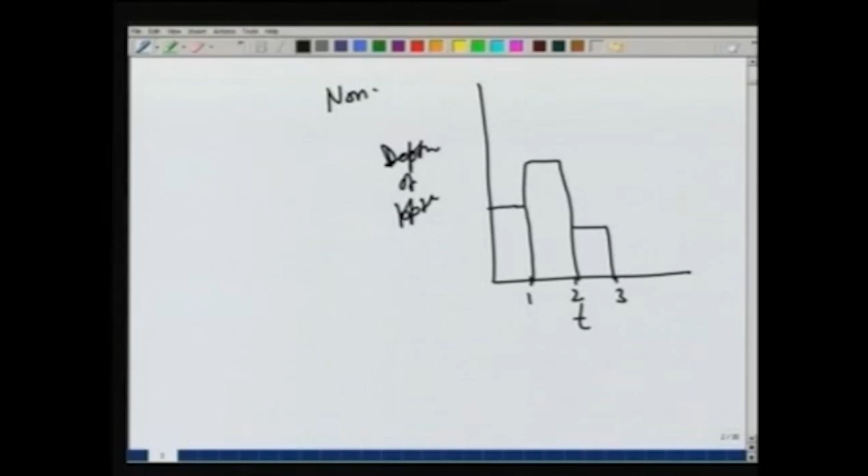would typically look like time versus depth of precipitation, and this will be 1 day, 2 days, 3 days like this, and there will be some depth measured during that day like this. So, this kind of precipitation record comes from a non-recording gauge. The drawback is that within a day we do not know when the rainfall occurred, and sometimes during the day the rainfall may occur with a very large intensity and we will not be able to capture it.

That is why recording gauges are used, and we saw three different kinds: the tipping bucket, weighing type or weighing bucket, and float, sometimes also called siphon. So, these recording rain gauges maintain a continuous record of the precipitation. So, time versus depth of precipitation would be a continuous curve which will be a continuously increasing curve, and different portions will give the intensity of rain. If there is no rain, then it will be horizontal.

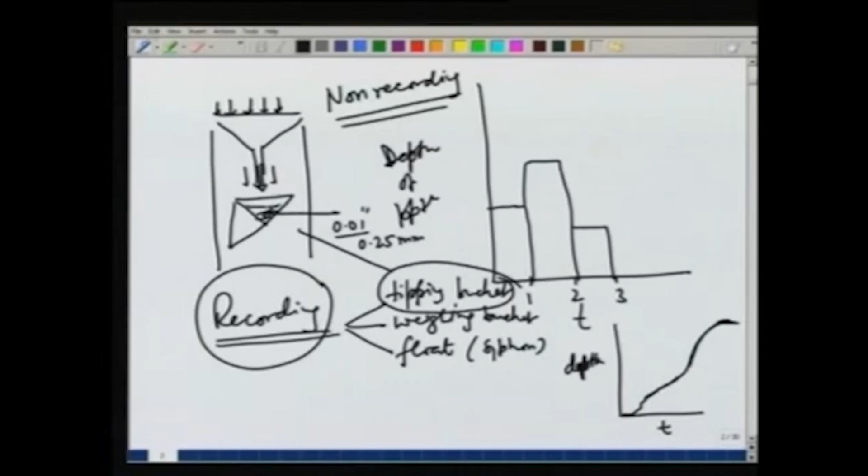In the tipping bucket rain gauge, we saw that there would be an arrangement like this, where there will be two buckets, and the precipitation, typically collected through a funnel, will fall over one of the buckets, and when the bucket is filled up to a certain level, this level generally is about 1/100th of an inch or 0.01 inch, or in millimeters 0.25 millimeter. So, that much precipitation occurring over the area of the opening of the rain gauge will fill the bucket up to some point, and as soon as it is filled, it will tip over and the second bucket will come

under the funnel. So, in this way the record of the tipping bucket would look like time versus depth, where depth really means one tip of the bucket. So, it will represent 0.25 millimeter or 0.01 inches. So, depending on how intense the rain is, we may get a record like one tip here, one more tip here. So, it will be discrete tips, and the number of tips will show the intensity of the rainfall. So, tipping bucket can record the variation of intensity with time.

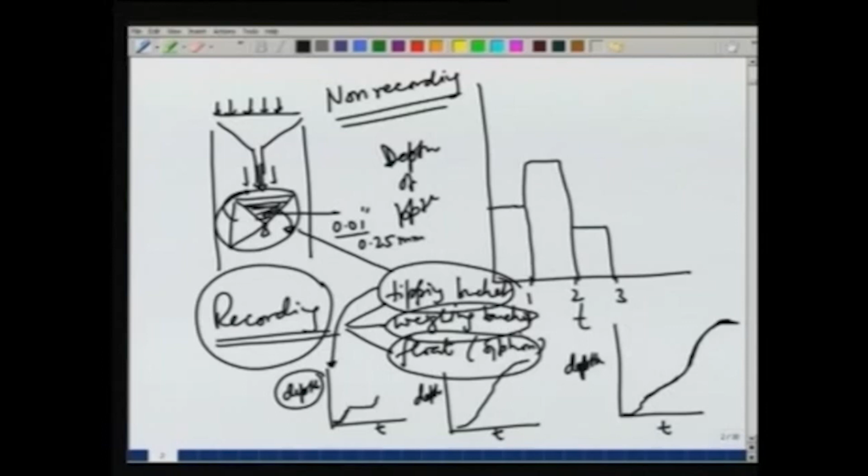Weighing bucket: instead of this tipping bucket, we have a bucket whose weight is continuously taken, and the weight can be calibrated to give the depth, and it will again give us a continuous record like this. Similarly, in a float or siphon gauge, the rain is again collected through a funnel. There may be a chamber here in which there would be a float which would rise with water, and this float will be connected to some measuring instrument which will record the location of the float and therefore the depth of rainfall continuously.

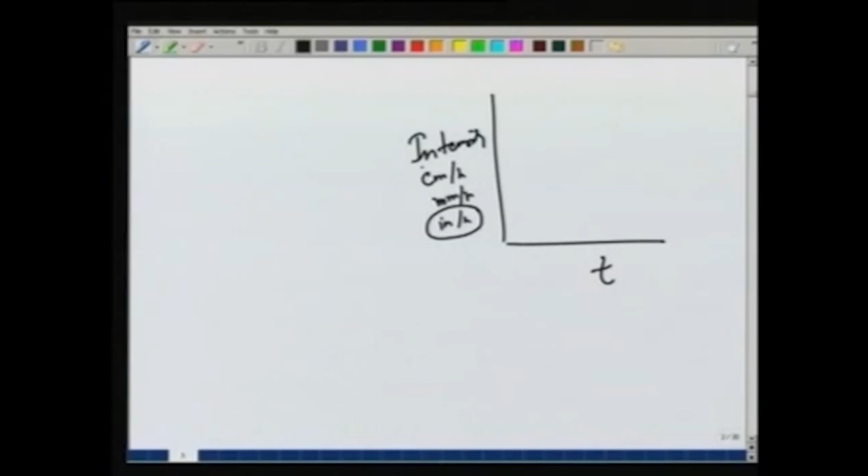So, the recording type of rain gauges give us a curve of the continuous depth, meaning accumulated mass or accumulated depth, which we call the mass curve. The slope of this line gives us the intensity at different times, and that slope gives us what is known as a hyetograph. So, time versus intensity. Intensity we can measure in centimeter per hour or millimeter per hour or inch per hour. In India typically we use the SI units, but in the US inch per hour is more common.

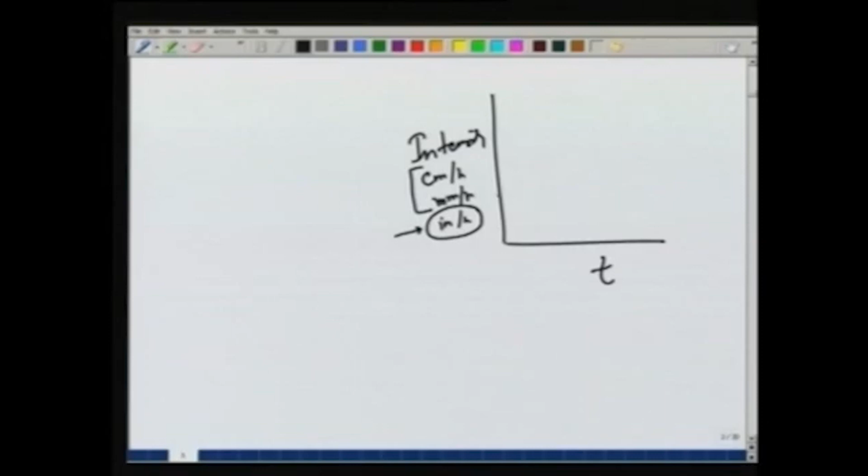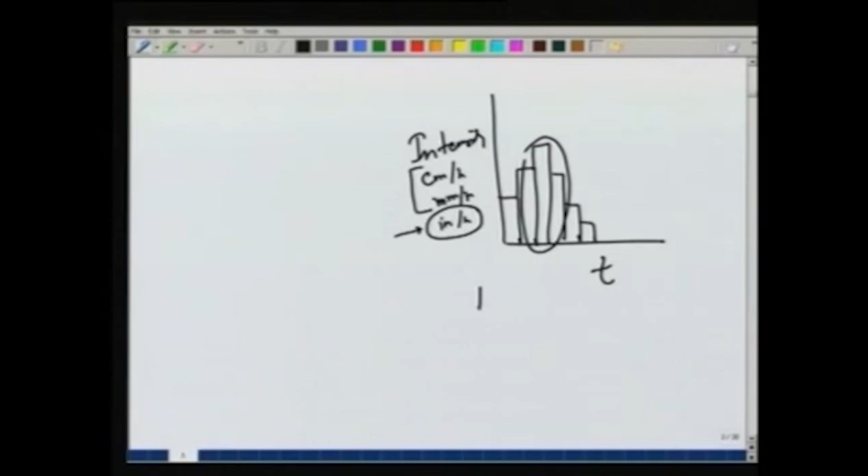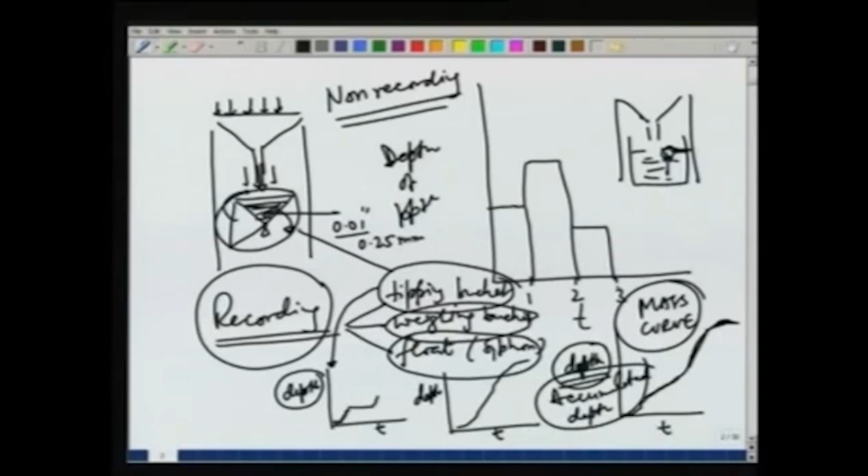So, a time versus intensity graph can be plotted, and we may get a discretized time versus intensity curve like this. For example, for a storm, typically the maximum intensity will occur somewhere in the middle portion. So, it will start with a low intensity, achieve a maximum value and then fall down again. So, this is known as a hyetograph. So, we looked at these two different methods of presenting the data: one is the accumulated depth, which we call the mass curve, and the other the hyetograph, which is the intensity versus time.

Of course, if we have a non-recording gauge, then typically it is done daily. So, we will get an idea about the daily accumulated mass, but intensity for a period less than a day we will not be able to find. That is why recording gauges are put. They will give us a fine discretization of time. So, for example, every hour we can find what is the intensity of rainfall. Non-recording gauges are less expensive, and recording ones of course are more expensive. The general practice which is followed is that 10% of the rain gauges should be recording.

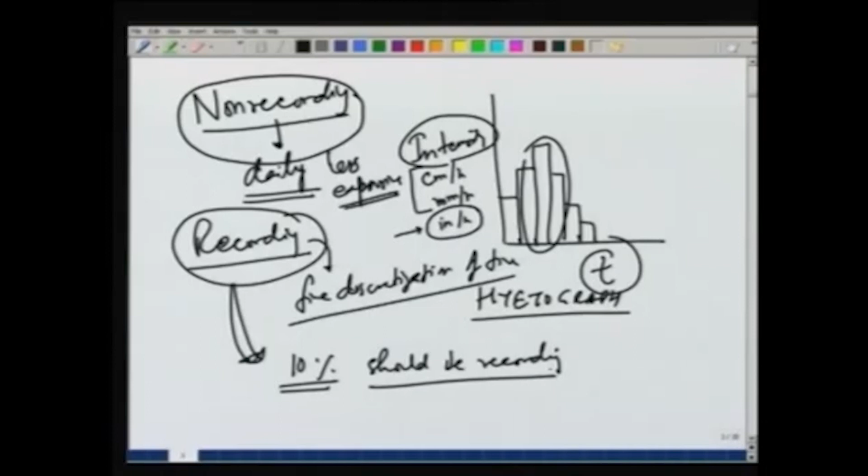So, in an area, if there are 10 rain gauges and one of them is recording, then for the non-recording data we can assume that the distribution of the intensity of rain within a storm will be similar to the recording station, and we can use the same kind of distribution over the non-recording gauges to estimate some kind of variation within the day.

Now, hyetograph and mass curve are two ways of representing the data. Once we analyze the data, the first thing we saw was what happens if there is missing data and what happens if there is inconsistent data. Missing data, we saw that there may be various reasons for data being missed, but if there is missing data, we can use the average of nearby rain gauges and assume that the missing data relates to those values.

For example, we can take the mean of the values at the corresponding stations, but if the rain gauges have very different normal precipitations, then we can take the average of the precipitation divided by the normal values. Inconsistent data, again, may be caused by various factors, and some of them may be moving the rain gauge from one location to the other, or a change in the environmental conditions near the gauge.

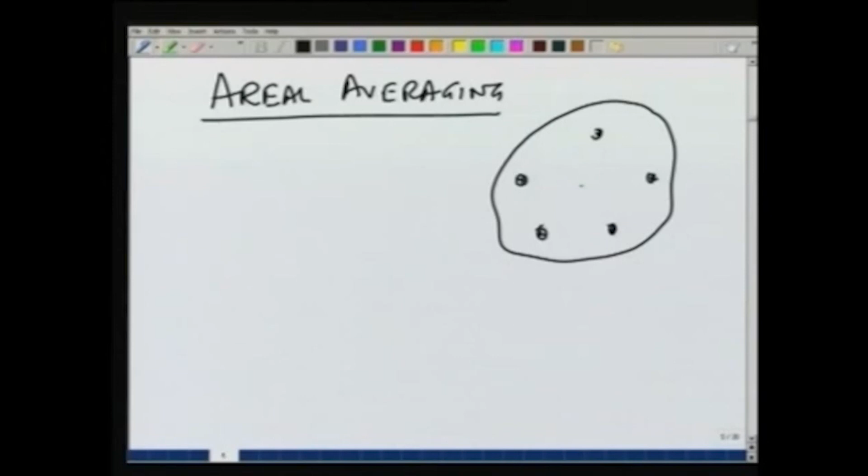So, with these two data analysis tools we have seen how to estimate missing data and how to make data consistent if it is found to be inconsistent. Today we will look at some other techniques, the first of them being areal averaging. So, if we have an area over which we want to find out the precipitation depth, and we have rain gauges, let us say located like this, then the value we get for the depth of precipitation at a rain gauge really represents a point value.

And most of the time we would be interested in finding out the areal average. So, over this area, if there is a river flowing, this may be the catchment area of the river, or it may be some other area, but we are interested in finding out the average depth of precipitation over the area, so that we can get the volume of water generated by that precipitation.

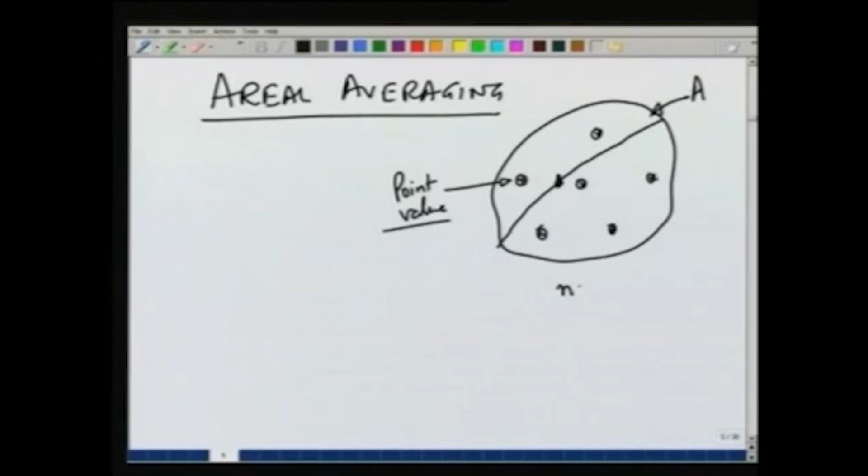So, suppose this area is A, and these are, let us say, n rain gauges or measuring stations, and for each of these n stations we have the value of precipitation P_i, i going from 1 to n. From this data we want to estimate the average depth of precipitation over the entire area A, so that we can multiply the area with that depth and get the volume of water generated from that precipitation event.

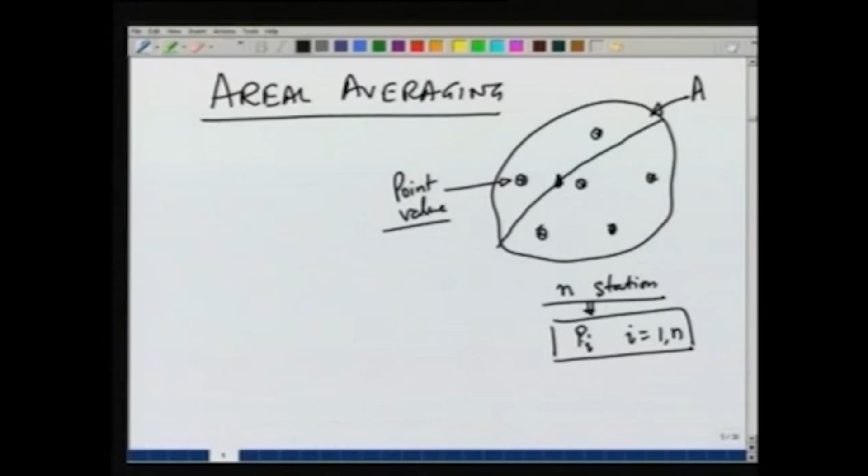So, the simplest way of course is to find the mean of the data. A simple arithmetic mean may be thought of as the average depth over the entire area. So, P bar can be thought of as the sum of P_i divided by n, where the summation is i equal to 1 to n. Once we get this average depth, we can multiply it with the area. So, A into P bar will give us the volume of water generated by that precipitation event, for which our point values are known from the rain gauges.

Typically, it will work okay, but the problem comes when the distribution of the rain gauges is not uniform over the area. For example, we may have an area over which we have, let us say, 3 gauges here and 1 gauge here. In that case, giving equal weightage to these 3 and this gauge may not be proper, and probably we should assign more weight to this station because it covers a lot of area, and these 3 may be assigned smaller weights.

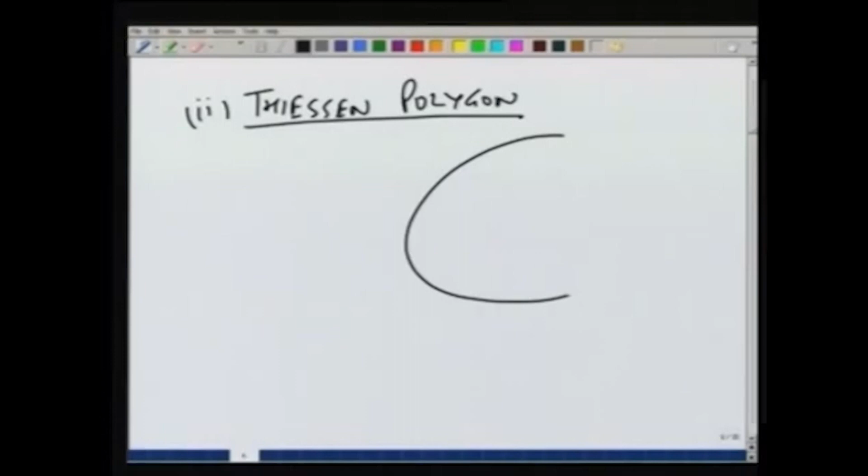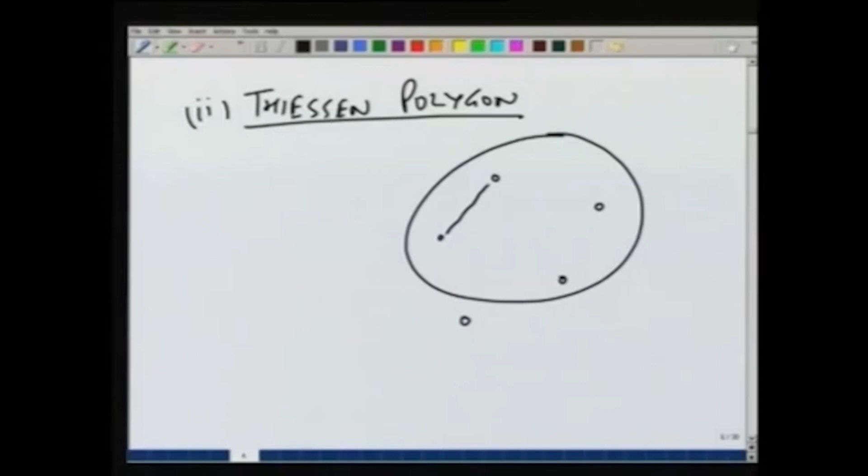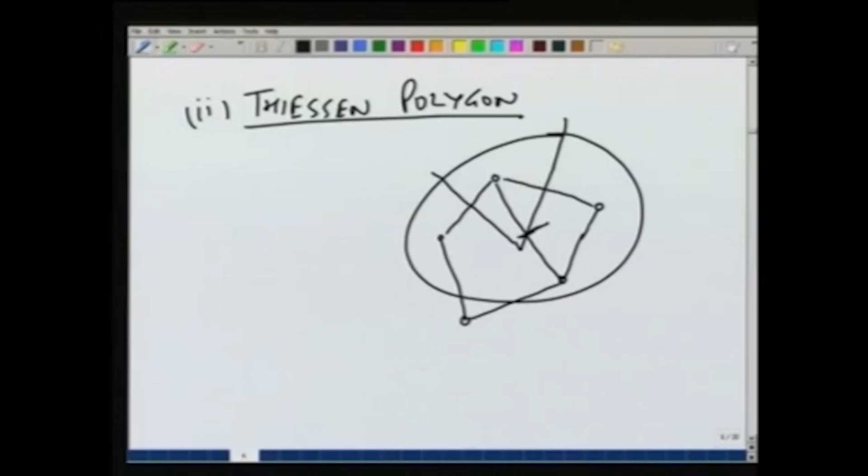And the rain gauge may even be out of the area, still we may give it some weight. In the Thiessen polygon, we join the stations by these lines and then we take the perpendicular bisector of these lines. Now, these perpendicular bisectors represent the area which is closest to a particular rain gauge. For example, if we take the example of just 3 gauges, we can explain it.

So, if there is a triangular network and we have these perpendicular bisectors, let us call these rain gauges 1, 2 and 3. Then this entire area is closest to rain gauge 1 compared to the other 2 gauges. Similarly, this area is closer to 3 than any other gauge and this area is closer to 2 than the other 2 gauges. So, we find out these areas, let us call them A1, A2 and A3, and assign the weight equal to this area divided by the total area.

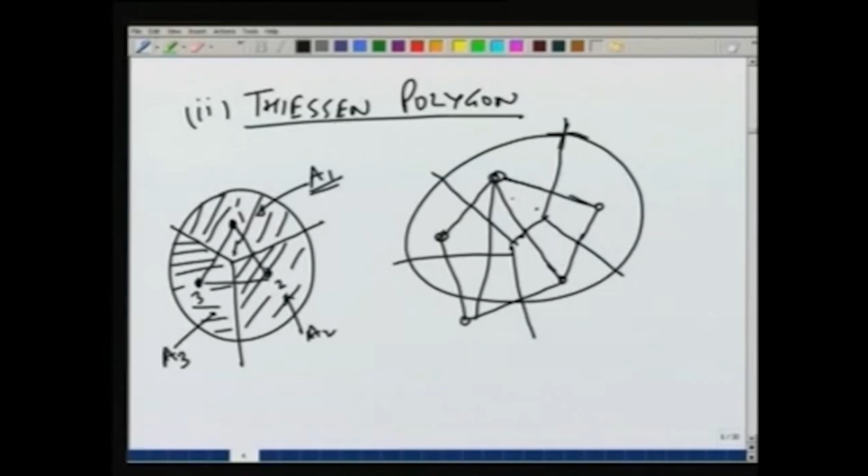Similarly, if we have more than 3 gauges, then the area surrounding a gauge would be the effective area for that gauge. The equation which we use is P bar. Again, it is a summation of all the precipitations with some weights. This A_i is the area of the polygon containing station i, and i again will go from 1 to n. A is the total area and of course, the summation of all the areas has to be equal to A.

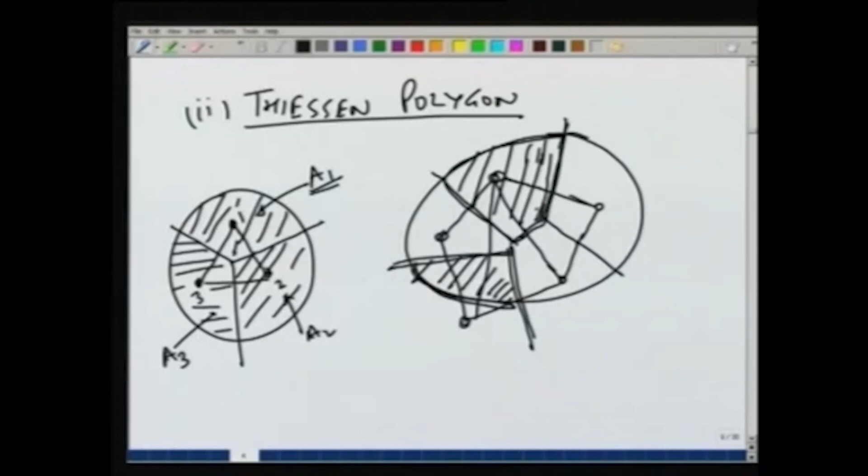So, if there is a station which is outside, then its Thiessen polygon will only cover the area within the catchment boundary. It will not extend beyond, so it will not be including this area. So, this term effectively means some weight which is assigned to the precipitation for that station, and that weight will depend on how much area is effectively covered by that rain gauge. So, this Thiessen polygon method gives a better estimate than the arithmetic mean.

But still it does not account for variation in, let us say, topography of the area. So, if we have an area where this part is at higher elevation and there are some rain gauges here, the Thiessen polygon will divide the area like this. It will not account for the topographic variation and therefore rainfall variations within that area. So, the third method which we use accounts for this possibility also, and it is called the isohyetal method, in which we use the rainfall values at each station also in dividing this area.

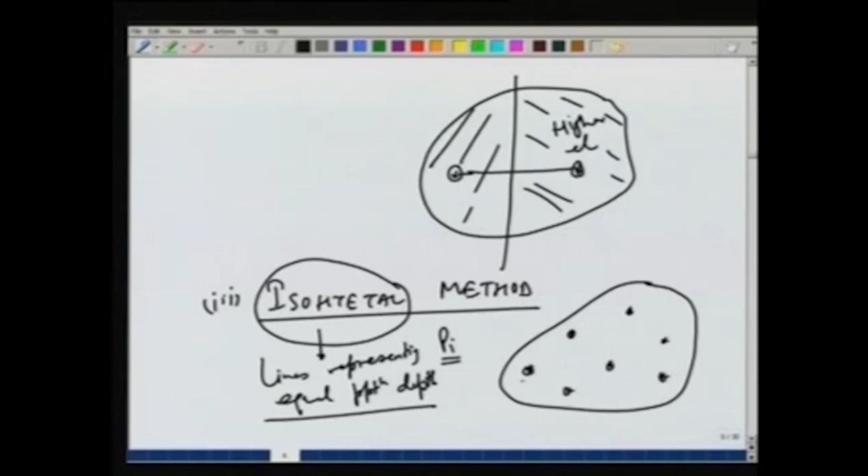So, suppose we have the rain gauges at these locations, and the values of the precipitation here are known. So, at all these stations we know the values of P_i. Now, using that P_i, similar to contour lines which show equal elevation, we can draw lines which are known as isohyetal lines. Isohyetal lines are lines representing equal precipitation depth. So, for example, if this is showing 4 millimeters, this is showing 6, this is showing 5, this may be 6.5, 7, 7.5 and so on.

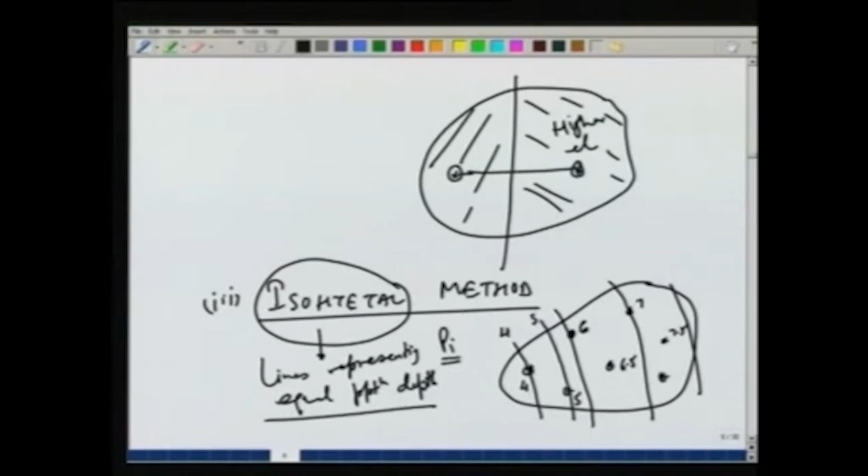So, based on that we can draw some contours which will show depths like this. So, this line represents the line on which the depth of precipitation is 4 millimeters. Similarly, 5, 6 and so on. And then we again assign a weight, but this time we use P bar as some average precipitation in the area, where P1 and P2 are the isohyetal values at the two ends of the area. So, if we call this area A1, then the values here will be P1 and P2. Similarly, for this area P2 and P3, and for this area P3 and P4.

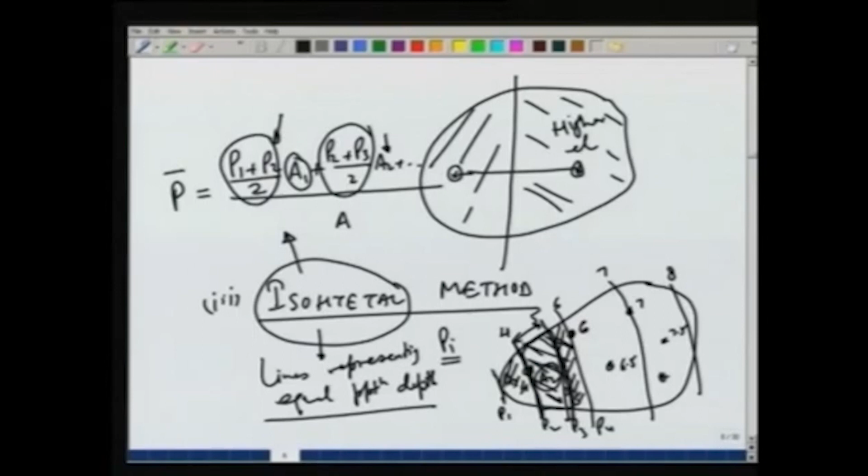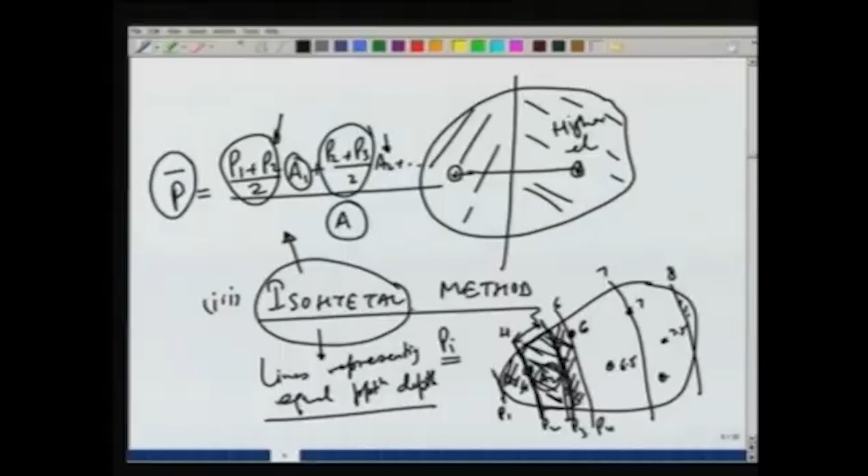So, for this area between the 4 and 5 isohyetal values, we will have 4 plus 5 by 2. So, we will say that this area has an average depth equal to 4.5, multiplied by the area A1. Similarly, the first area has average depth P1 plus P2 by 2, multiplied by the area, and so we will add everything up, divide by the total area and get our average precipitation. So, the isohyetal method is probably the best out of these methods, but it requires a lot of data to be able to plot the isohyetal maps.

So, once we convert the point values from the rain gauges to areal values, we can analyze and present the data in different forms. One of the forms in which we can present the data is known as the depth duration curve.

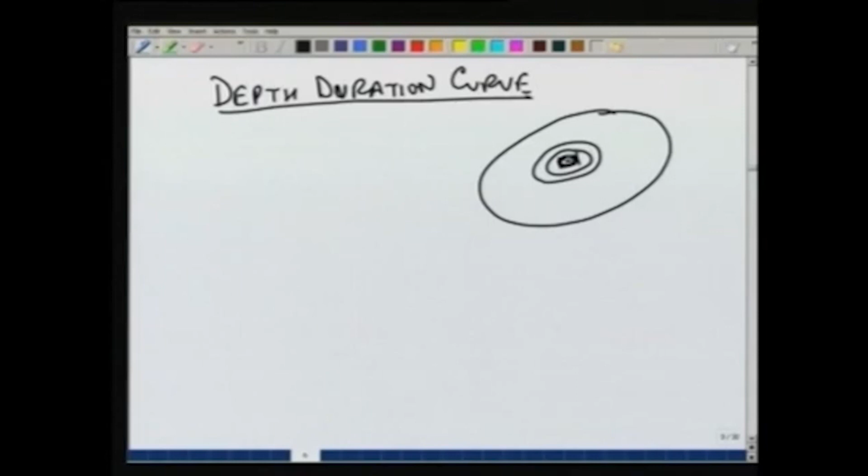And it depends on the area. So, if we are talking about one catchment area, suppose we have some storm occurring over this area, typically the storm will have highest intensity at the center. So, near the center intensity will be very high and the depth of rainfall would be some high intensity into the duration into the area. Now, as we move away from the storm center, the area increases, but the intensity decreases.

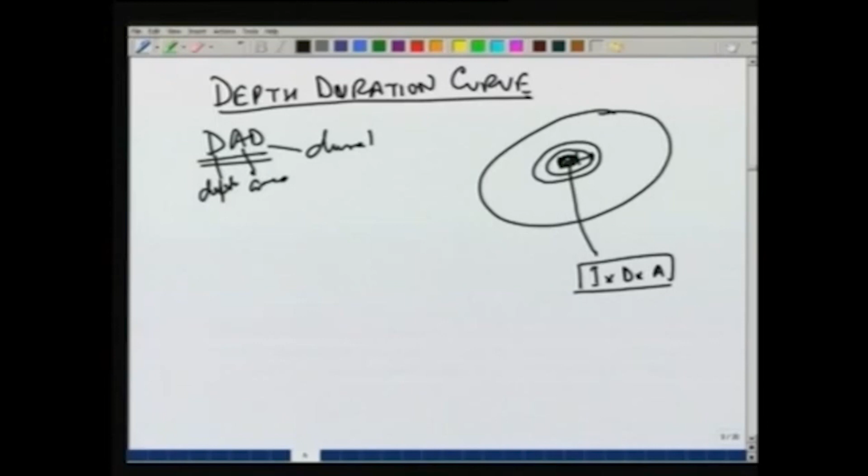So, in order to know how the depth is affected with the area, we have these depth duration curves or depth area duration curves, commonly known as DAD curves, depth area duration, and what it shows is a curve where area, typically in square kilometers, versus some depth of rainfall.

Now, if we take a particular duration of rainfall, we can get an equation where P naught is the depth at center of the storm. K and N are some coefficients and A is the area. So, as we move away from the center or the eye of the storm, the intensity decreases. Depth of course will decrease as we increase the area, but the rate at which it will decrease will become slower. P0 is taken at the center of the storm.

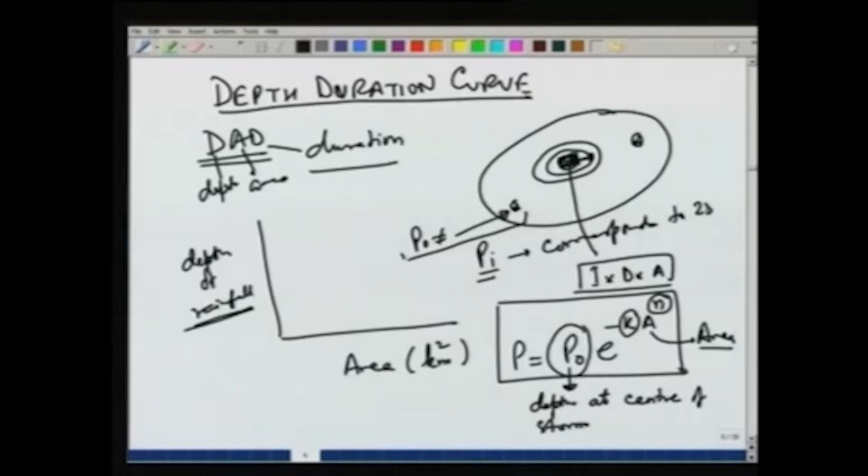Suppose we have a rain gauge here, then it is very unlikely that the eye of the storm will be exactly on the rain gauge. So, the rain gauge value generally is not taken as P naught. And what we assume is that the point value at the rain gauge represents an area of about 25 square kilometers. So, the PI at the rain gauge corresponds to about 25 square kilometers. So, using this we can estimate P naught using this equation, putting the area equal to 25 square kilometers and P equal to PI. So, P naught can be estimated and then we can estimate the depth of rainfall for any given area using this curve.

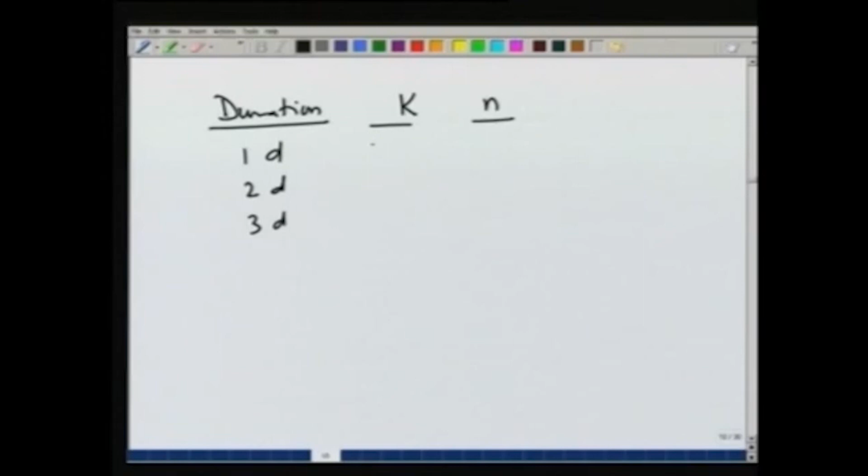The values of K and N can be shown here. So, this is the duration of the storm, K and N. Typically, duration will be like 1 day, 2 day, 3 day. K value 0.0085. Now, this data is shown in millimeters. So, if P is in millimeters, then the values of K and N would be given like this, 0.66. Area, as I said, generally is in square kilometers and P in millimeters, and P naught also would be in millimeters. Actually, P and P naught will have the same units. So, we can use both of them in centimeters or both of them in millimeters.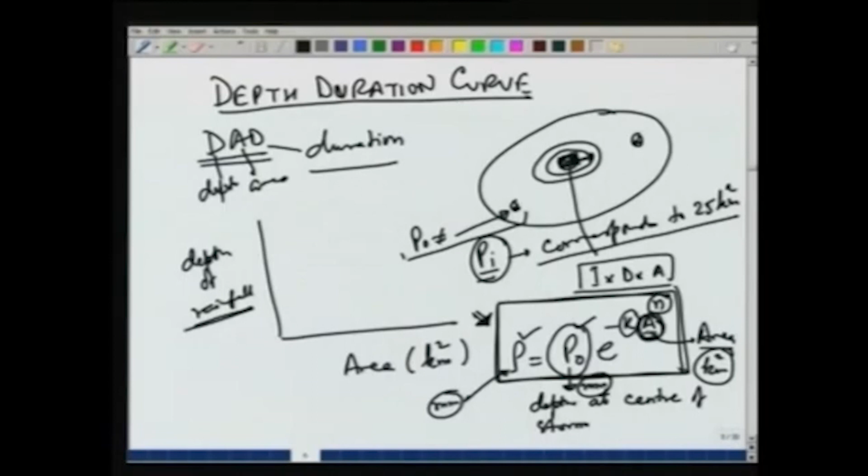The units of A will affect the constant K. So, here the constants which we are showing, 0.00085, are based on area in square kilometers. Similarly, for 2 day and for 3 day. N is 0.66, 0.63 and 0.60. So, these values can be used to obtain the variation of depth of rainfall with area.

The other thing which we can do is plot a curve which shows area versus maximum average depth, and this may be in centimeters and square kilometers, and this will depend on the duration of rainfall. So, for different durations we can have these different curves. This, for example, may be 18 hours, this may be 6 hours, 1 hour and so on. So, the maximum average depth means that we will take some extreme storms occurring in that area, and using those extreme storms we can estimate what is the depth for different areas.

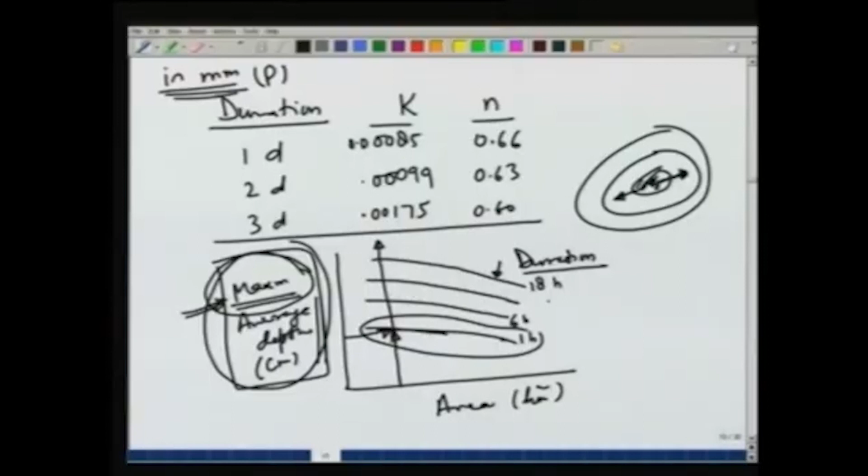These are in centimeters, and this is based on severe storms occurring in that area, and you can see that if a storm occurs for 1 day over a small area of 0.13 × 10^4 square kilometers, we can expect a rainfall of depth 76.5 centimeters.

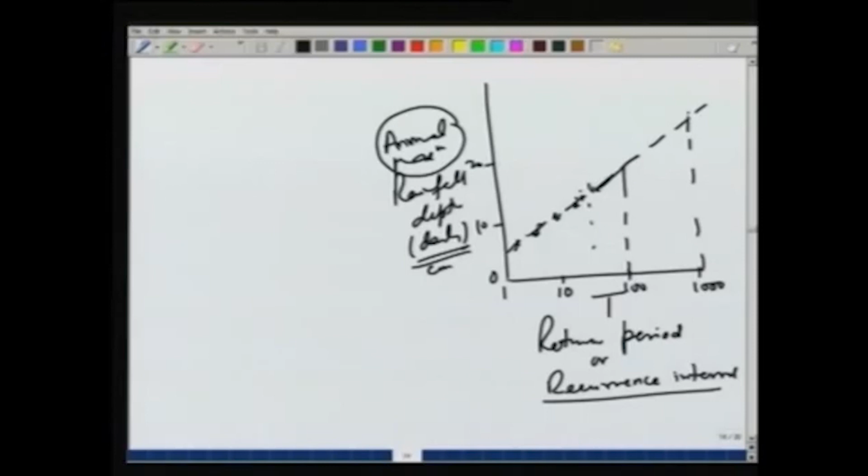So, typically we would get a curve like this, and suppose we have 50-year data, then generally it will stop near 50. But based on these available records, we can extrapolate the data and obtain the 100-year rain or the 1000-year rain. So, this gives us some idea about how frequently a rainfall event will occur, which is important to

us because different projects will have different useful life, different importance, and based on that we can decide what return period to use for an event used in the design of that project. Frequency analysis is important from this point of view. The result of this can be shown in terms of what are known as intensity, duration, frequency analysis.

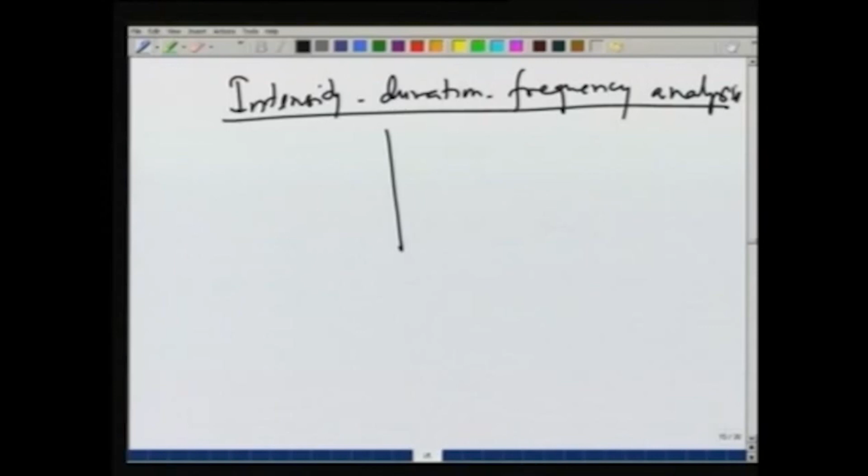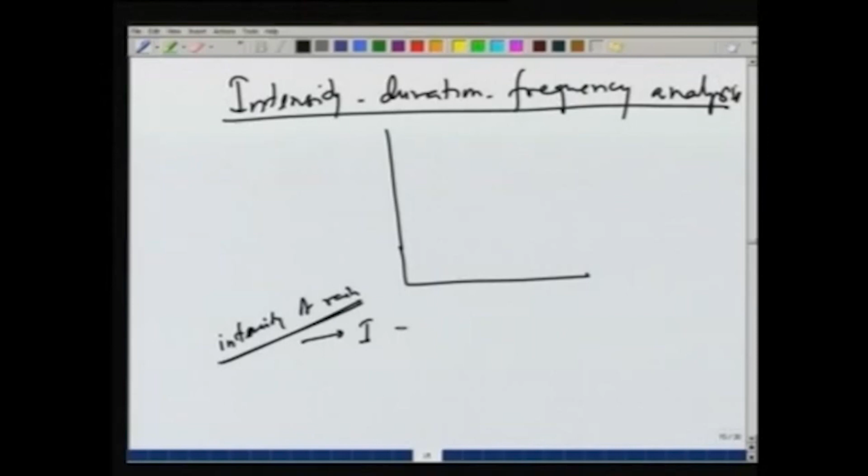So, we can say that as the duration increases, the intensity will decrease. As the return period increases, the intensity will increase. So, in other words, higher intensity storms will have a higher return period, they will be less common, and as the duration increases, the intensity decreases, because sustaining the intensity for a larger duration is not possible, or shorter duration storms will have a very high intensity. As the duration increases, the intensity will decrease.

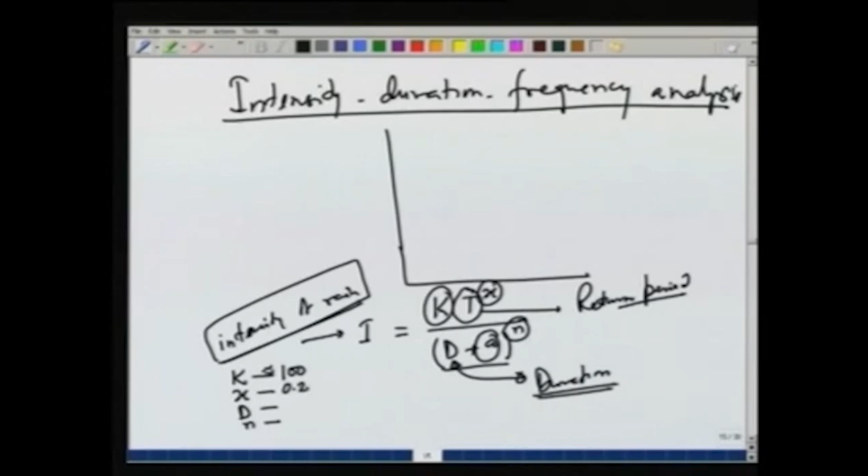The values of K, x, n and a vary from area to area, but some typical values for Indian conditions can be written. There is a wide range of these values given in literature. Generally, we would use some value close to 100 for K, about 0.2 for x, a is about 0.5 and n generally about 1. But there is a wide range, for example, K may vary from 10 to 120 and so on.

So, these typical values can be used and this will give us the intensity of rain in millimeter per hour. The return period typically is in years and duration is generally in hours. So, these values will enable us to compute the intensity of rainfall for any return period and for a given duration of rainfall. Later on we will see that this duration will depend on the catchment area.

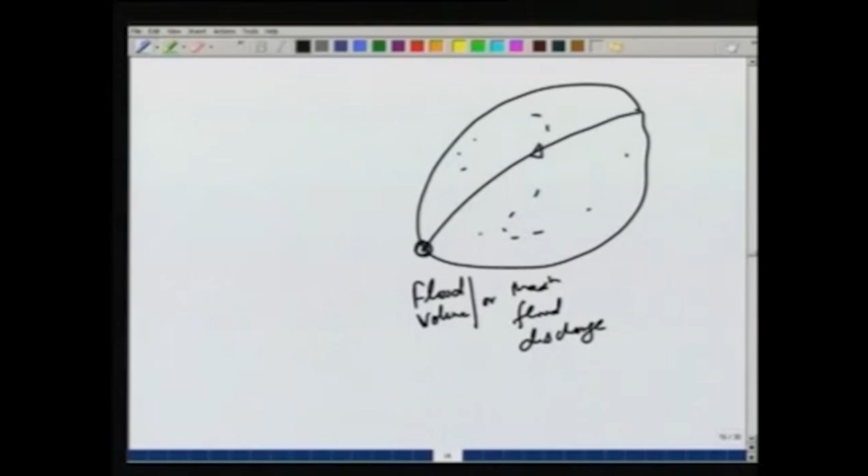For example, if there is some area and we are interested in finding out the flood here, flood volume or maximum flood discharge, typically what we would like to do is have a storm over this area which will cause the maximum runoff at this point. And for that purpose, as we have seen, the intensity will decrease with the duration. So, we want a minimum duration

and we do not want a duration which is very small also, because then the entire area of the catchment may not contribute to the flow. So, if the duration is very small, suppose only this much area is contributing to the flow at one time and then the flow from this area reaches after some time, then we will not be able to get the maximum flow discharge. So, there we use the concept of time of concentration.

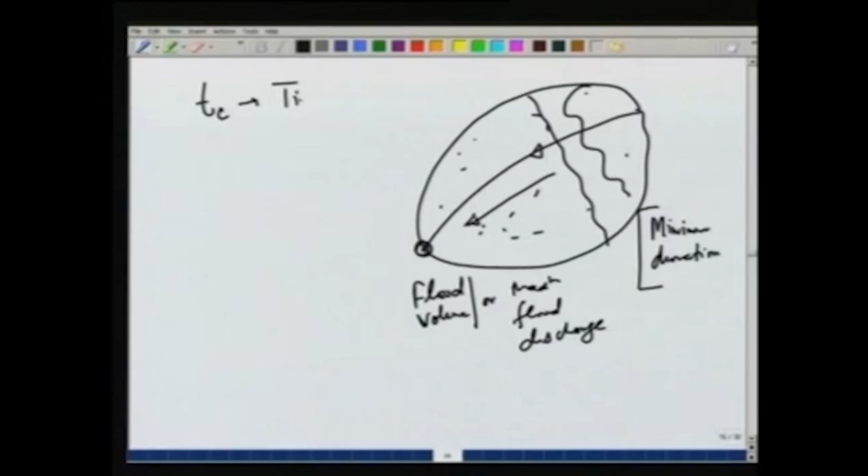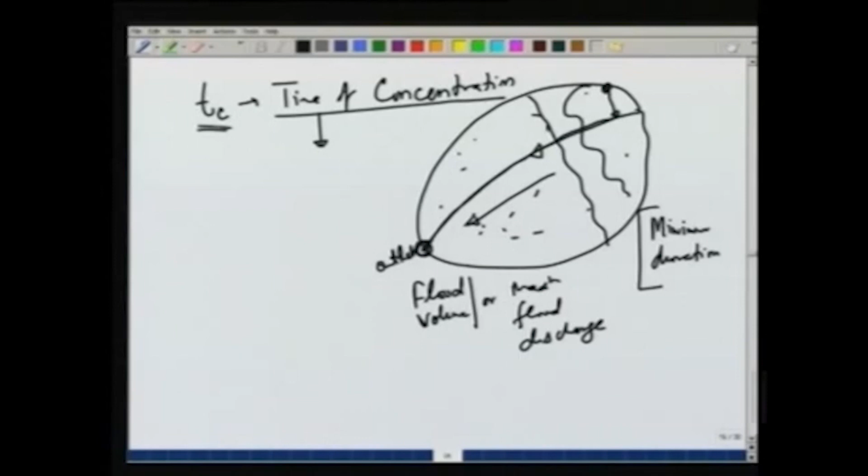Which is the time taken by a water drop falling on the farthest point in this catchment to reach the channel and to reach the outlet. So, the time taken from the farthest point to the outlet is the time of concentration, and as we have seen, as the duration increases the intensity decreases. So, if we want the maximum intensity, duration should be at a minimum and Tc is that minimum duration. So, generally when we use the intensity duration frequency curves, we take the duration as the time of concentration, because that is the minimum duration which we should take.

If suppose we take our duration less than Tc, then the rainfall has already finished over this area. This water will take a time of Tc to reach the outlet. So, at this time Tc, the entire area of the catchment is not contributing to the flow, because the rain has already stopped. This area may still be contributing to the flow, because different areas will take different times to reach the outlet, and at the time Tc, the entire area contributes to the flow, because the raindrop falling here has also reached the outlet.

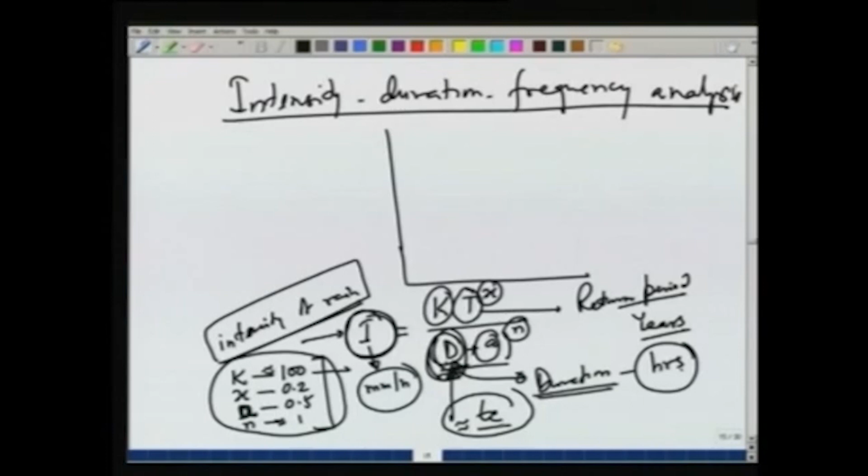Therefore, this Tc is important, and in the intensity duration frequency curve, this D can be taken as Tc to get the maximum flow possible at that location. So, intensity duration frequency curves are important in deciding what intensity of rainfall to take for designing a project. Duration, we have seen, depends on the catchment area, the time of concentration. Frequency depends on the importance of the project.

For a more important project, we should choose a return period which is of the order of maybe 100 years or sometimes 1000 years. For not so important projects, we can use 10 years or 20 years return period also. So, this equation enables us to obtain the intensity for different durations and frequencies. Values of k, x, n and a, general average values are here, but we will have to find out these values for the area under consideration, and using that we can estimate the intensity.

The other thing which we are interested in is probable maximum precipitation. Some projects may be so important, or it may cause a lot of loss of life and property if the structure fails, that we have to find out what is the maximum precipitation which can occur in that area, causing flood in that area. So, a probable maximum precipitation generally we can obtain based on climatic factors.

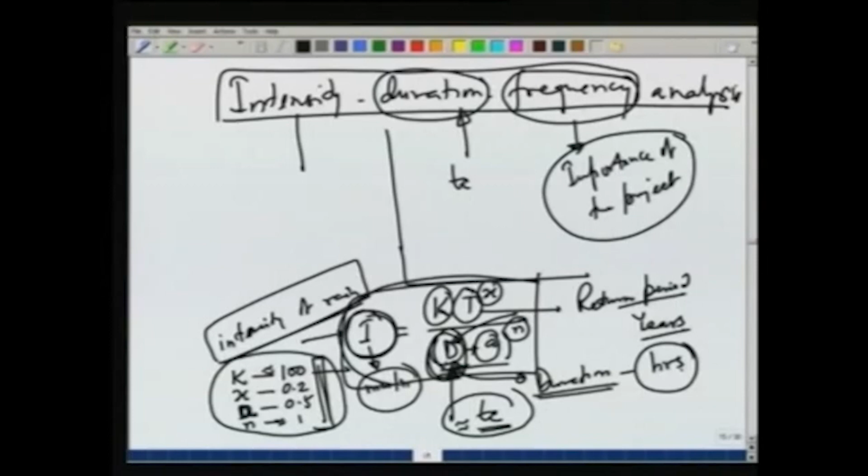Intensity is also important in deciding, let us say, soil erosion in an area. The erosion can be correlated with the intensity, so for that purpose also intensity becomes important. For maximum flood, of course, we want to be very safe, and we can use this kind of equation. The frequency distribution we have seen how to analyze, and from that we can get the mean and the standard deviation of those values. Taking a very high multiplying constant of about 15, we can obtain probable maximum precipitation.

Some typical values for India: there are some empirical equations which are generally given for 1-day PMP. So, this is probable maximum precipitation, which is generally written as PMP. 1-day PMP for India is generally taken to be about 40 to 100 centimeters, and data from all over the world has been collected, and an equation like this has been proposed for the PMP for different durations of rain.

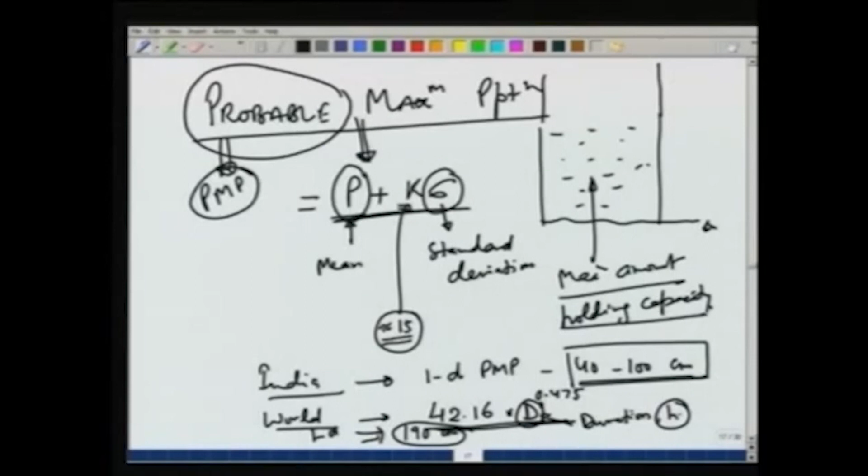So, in today's lecture, we have seen some of the ways of analyzing the data collected from the rain gauges. The data can be recorded continuously, or on a daily basis. The data can be analyzed to find if there is any missing or inconsistent data, and that can be corrected; we have seen some methods of correcting that. Then some alternative ways of presenting the data, for example, the intensity curves and the depth area duration curves, have been studied, and the intensity of the rainfall will depend on the frequency we adopt and the duration of the rainfall.

So, intensity duration frequency curves, or IDF curves, have been studied, and we have seen the use of those curves. The duration can be taken as the time of concentration if we are interested in finding the maximum flow at the outlet of a catchment. Then we can also find the probable maximum precipitation, which is the maximum value of precipitation which can occur at a given location for different durations of rainfall, and using those values we can estimate the ultimate maximum value which can be used for very important projects, although PMP is very high and it is not really used for general design purposes.